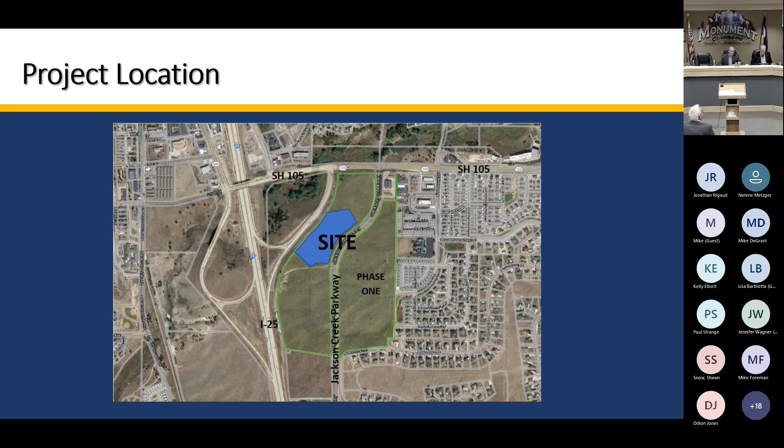Okay, so as you can see on the screen before you, project location. This project is located west of Jackson Creek Parkway, south of State Highway 105. Existing zoning for this area was approved by the Board of Trustees on June 15th, 2020, known as the Village Sketch PD at that time. The approved sketch PD identified the project area in question this evening for Lot 5 as multifamily with 15 to 25 dwelling units per acre.

The sketch PD plan from the town's previous land development code describes it as a conceptual version of the preliminary PD site plan. In preliminary fashion, the sketch PD plan indicates the proposed uses and densities of the property, including open space, parks, and regional trail corridors, and major planned roadways and utility services.

February 7th, 2022, Board of Trustees approved resolution number 08-2022, a resolution approving a preliminary final plat for Monument Junction West, filing number 1. Monument's Land Development Code, section 18.01.310, discusses site-specific development plans that are subject to vested property rights, including an approved final PUD, an approved conditional use site plan, and an approved final subdivision plat.

In this case, of course, we're talking about the approved final subdivision plat, which has led us to where we are this evening, which is to discuss the PUD. Additional zoning on this site includes the Woodmoor Water and Sanitation District, which will provide both water and wastewater services for all development within Monument Junction. Existing surrounding uses include the YMCA, I-25, vacant land to the south, and the remainder of the undeveloped Monument Junction parcel on the east side of Jackson Creek Parkway.

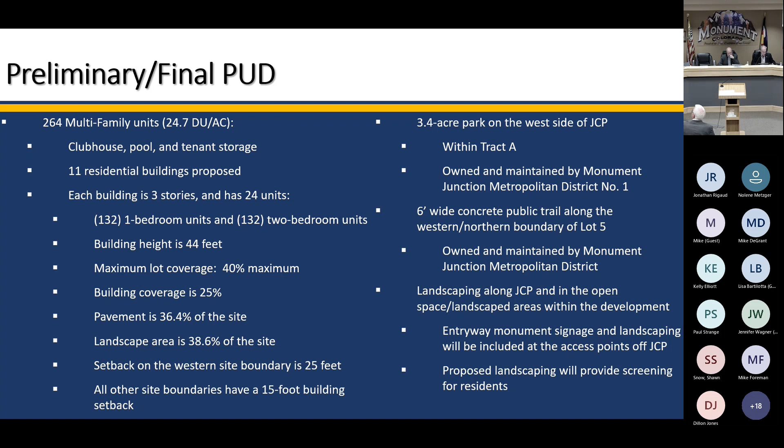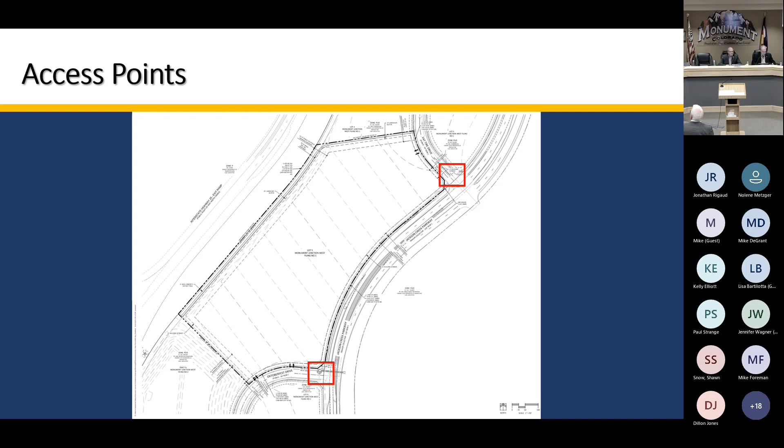The plan was looked at through the lens of the Town of Monument's Comprehensive Plan, which lists numerous attributes and characteristics used to measure a project through that lens to understand if it is compatible with the type of land use on the map in place for the comprehensive plan.

The map shows this area as a mixed-use development. Some of the policies related to that mixed-use type development are as follows. The first is to allow for a wider array of land use types to meet changing community needs. I'll read through this so we understand what our comprehensive plan says, since sometimes elements in it might seem to contradict one another because there are lots of aspirational goals within that plan. This first one discusses this wide array of land use.

The variety in residential density, type, lot size, and price point proposed will expand the housing options in Monument. In particular, there are insufficient housing options in the Town of Monument to meet growing workforce demand. The proposed multifamily will provide a more affordable housing alternative to serve the growing area workforce.

The next policy would promote infill development on vacant land, with attention to the vacant or underutilized land in and around the downtown core. The proposed development of this vacant and underutilized infill site, located less than a mile east of the downtown core of Monument, will diversify land use in the town and provide much needed housing options.

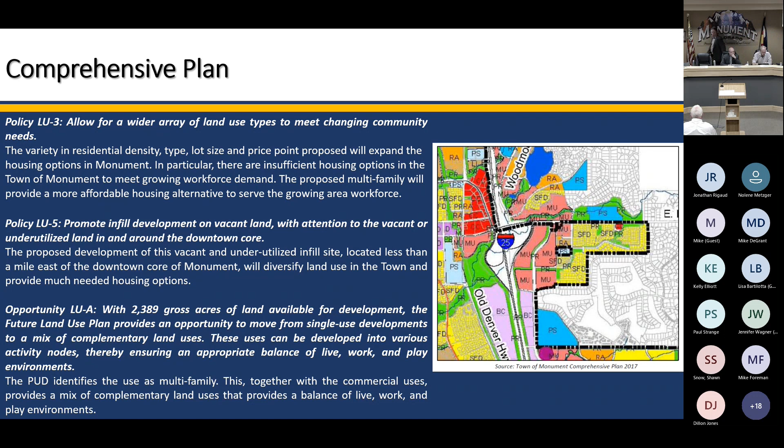This particular PUD identifies the use as multifamily. This, together with the commercial uses, provides a mix of complementary land uses that creates a balance of live, work, and play environments. Additionally, planned developments provide more amenities than traditional zoning in return for greater flexibility.

This is typically in the form of parks, open space, and trails. When approving planned developments, the town looks at ways to locate dedicated land and trails to connect with existing parks, trails, and usable open space. More detail now for how that relates to this development.

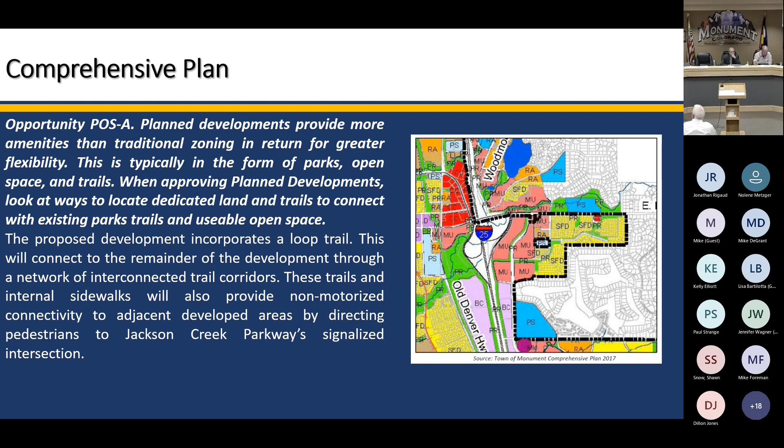The proposed development incorporates a loop trail. This will connect to the remainder of the development through a network of interconnected trail corridors. These trails and internal sidewalks will also provide non-motorized connectivity to adjacent developed areas by directing pedestrians to Jackson Creek Parkway's signalized intersection.

Staff recommendation for this project: staff reviewed the proposals in light of code requirements that affect what happens on a piece of land, as well as how the proposal addresses the comprehensive plan. Planning staff must weigh the options and use the comprehensive plan as intended, as an advisory and aspirational document that will guide the types of growth in Monument.

In the end, the town staff are obligated to pursue the approved sketch plan and final plat for the site that outline percentages of land use. In the sketch plan, commercial uses were given a lower land use percentage overall in comparison to mixed residential forms.

Staff recommends approval of Monument Junction West Lot 5 preliminary final PUD based on the findings that the preliminary final PUD is in conformance with the review and approval criteria from the Town of Monument's Land Development Code Sections 18.03.450 and 18.03.460.

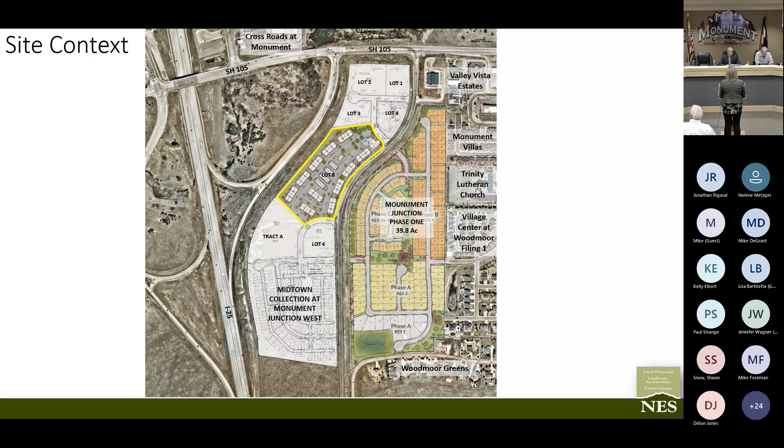Tract A is a planned detention pond that will be combined as a park use, so there will be a park in Tract A. And then on the south side is the Midtown Collection at Monument Junction West, which has been submitted to the town, for 129 single-family detached residential units at a little higher density. So that's the overall context for the development. Next slide.

So originally this property was zoned PCD, Planned Commercial Development, with the Regency Park overlay. It was zoned as PCD for many years. It's been owned by the previous property owner since the 80s, and was in commercial use, commercially zoned vacant property for many, many years.

In 2015, initially they decided to try to rezone that to residential in its entirety. That was denied by the board at the time. Then we came back in 2019 with an application to rezone the property for a mix of uses that were subsequently approved in 2020, including commercial and residential of different densities.

So PCD was the zoning. That has now been translated - it was zoned for PD, but that was translated into a PUD zoning in the context of the rewrite of the zoning code. So the current zoning is PUD.

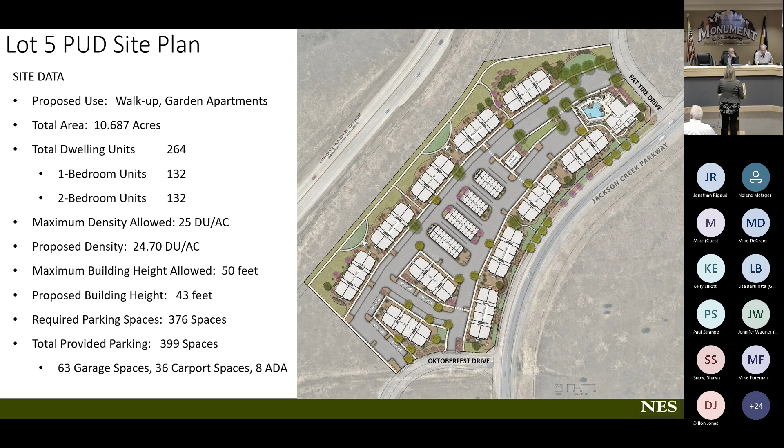Next slide. So this and the next few slides are going to look at setbacks and buffers. We are providing a buffer to the north because the adjacent lot will be commercial development, so there is a need for buffering between non-residential and residential. On the west side, we have a 55-foot utility and drainage easement, so that requires the buildings to be outside of that easement area. We actually have a 55-foot setback on that side of the development, which is more than was originally planned. On the sketch plan, that showed 25 feet, but because of that required utility easement, we are at 55 feet.

On the south side, we have 15 feet, and on the east side, we have a 15-foot building setback to Jackson Creek Parkway, and I'll talk a little bit more about that. But when we presented this plan to staff, they were very keen on us having that presence on Jackson Creek Parkway to create a more interesting street scene and also to create that presence on what they saw as Jackson Creek Parkway moving to be a future multimodal street.

It's going to be a major collector, 4 lanes in the future, and that's going to include sidewalks and bike lanes. So by creating that closer presence to the road, they preferred to have that active street frontage and put the parking behind the buildings, screening the parking with the buildings and providing a more active frontage. That was very much encouraged by staff when we had our pre-application meeting, and that's the approach that was taken to the development and design of this site.

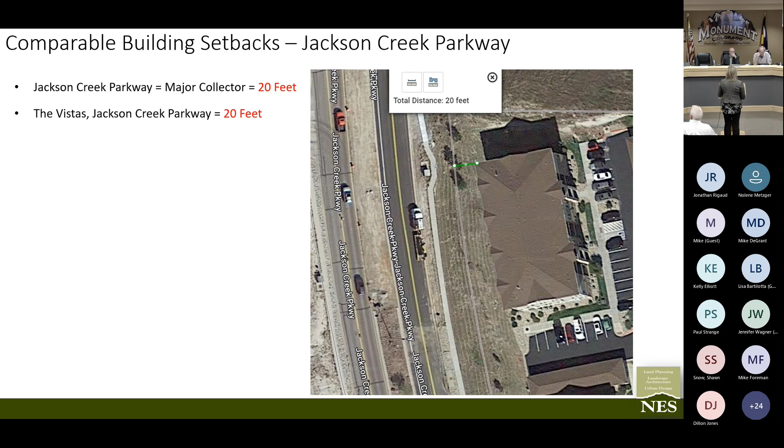Next slide. So we measured our building setback—we've asked for a minimum of 15 feet from Jackson Creek Parkway. That's because of one pinch point on the site where the balcony is about 17.5 feet from the edge of the property line, and that's only in one location. You can see from this slide that there are multiple locations where the setbacks exceed 20 feet, and the average is about 23 feet. So we are meeting that previous expectation of the setback from Jackson Creek Parkway.

Next slide. This diagram shows a couple of things. First, it shows the actual building height of 43 feet compared to the maximum allowed—you can take it to 36 feet to the midpoint of that sloping roof. Our minimum setback of 15 feet to the property line is identified, with PL representing property line. Between the property line we have a landscape area within that 15 feet, which is about 17 feet to the balcony and just under 20 feet to the nearest building point.

But from the property line to the edge of the pavement of future Jackson Creek Parkway is a total of 41 feet from the edge of the building to the edge of the curb—a fairly substantial setback from the street itself. So the buildings won't be 15 or 20 feet from the edge of the road as you drive along Jackson Creek Parkway; they'll be set back about 40 feet based on the requirements for a sidewalk and tree lawn. This plan assumes a widened Jackson Creek Parkway, widened to the east—the existing two lanes will form the future southbound lanes, and the future northbound lanes will extend to the east. So that's really to the edge of the current curb line of Jackson Creek Parkway. Next slide.

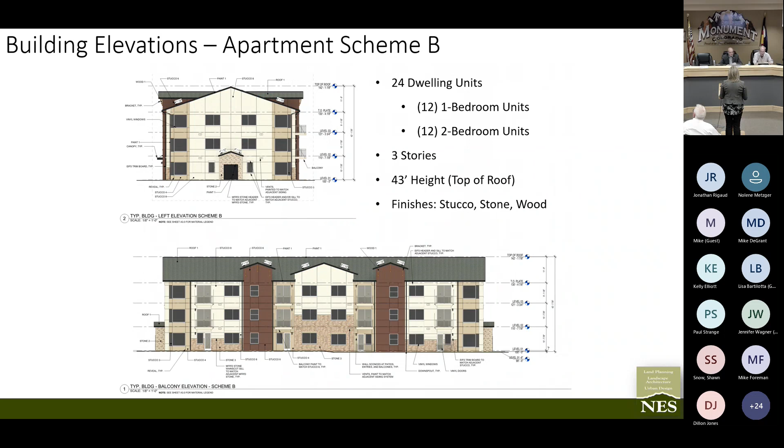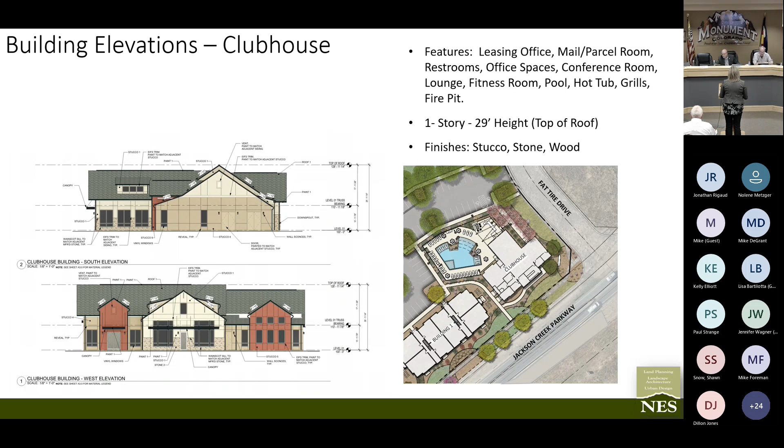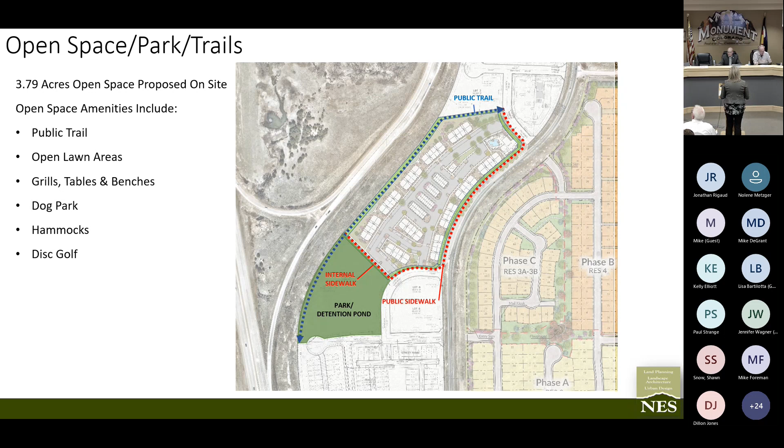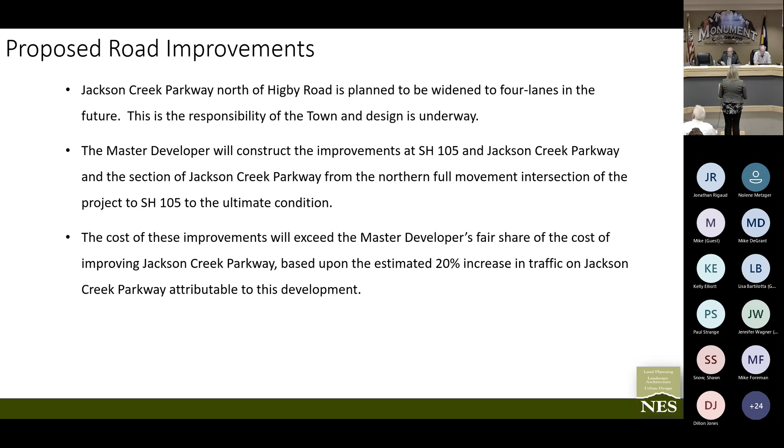So just to reiterate the actual improvements, the first one to note is that there will be an eastbound right turn deceleration lane and free right turn lane from 105 onto Jackson Creek Parkway. That doesn't exist today, and it will significantly improve traffic flow. Right now, if you want to turn right and there's somebody in front of you going straight, you're stuck waiting.

So this will allow you to turn right. Moving on, Jackson Creek Parkway going northbound and then turning left onto 105 westbound, there will be 2 left turn lanes, and the right turn lane going east will be extended. This will significantly improve the turning operations at Jackson Creek Parkway onto 105, with the intent to limit some of the queuing currently experienced.

There's also going to be some restriping to accommodate a dual westbound left turn lane from 105 onto Jackson Creek Parkway. And then there will be a southbound right turn deceleration lane that will go into Laughing Lab Way, which is the first access into Monument Junction. That will be right in, right out only at that point.

Moving further south to the Fat Tire Drive access, which is the first access into Lot 5, this will be a full movement intersection because Fat Tire Drive goes into the development on the east side of Jackson Creek Parkway. So there will be a right turn deceleration lane there and a northbound left turn lane. Those are the principal improvements that will be implemented by this developer from Fat Tire Drive north to Jackson Creek Parkway and 105.

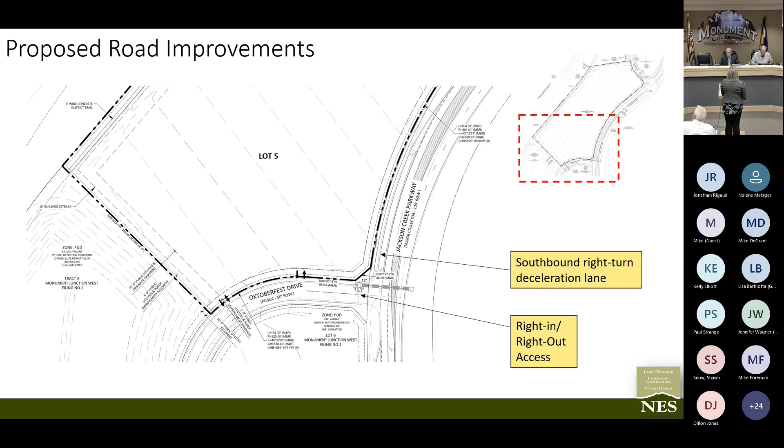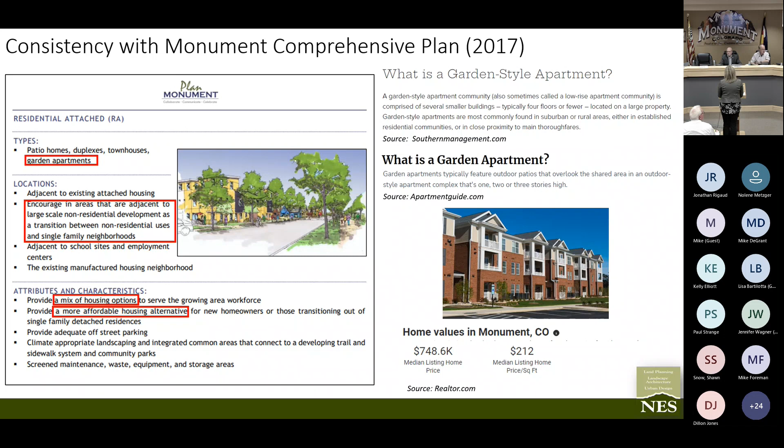I mean, from the top-down view, I just don't believe it's going to look the same. Well, if I could go back to the slide with the cross section, that's exactly what you'll have here. You're correct that from the edge of the pavement on Jackson Creek today, you have approximately 20 feet to the property line, and then you go up a fairly significant hill because the vistas are set up in elevation, which these buildings won't be. They will be pretty much within a couple of feet of the grade of Jackson Creek Parkway.

So they're not going to be elevated about 10 feet above Jackson Creek Parkway as the vistas are. And you have the distance from the edge of the building to the property line. So we have our 15-foot setback, but the actual total distance from the building to the edge of Jackson Creek Parkway is 40 feet—approximately 20 feet of that is within the property, and approximately 20 feet is made up of the sidewalk and the parkway, the green tree lawn alongside Jackson Creek Parkway.

So it is a very similar scenario to the setback you just referred to of 20 feet and 20 feet to the vistas. That's one area we can agree to disagree on, but there is a very similar distance from the edge of Jackson Creek Parkway to the building in this case. And like I said, this one is not going to be elevated approximately 10 feet above grade.

In addition, we have constraints on this site with the utility easement on the west side—it's 55 feet, so that narrows the site considerably. We have looked at alternatives and moving the buildings back, but we start getting into pinch points for the parking. So our suggested compromise, which we felt was a better approach to addressing the neighbor's concerns, was to remove the building. That was the compromise we felt achieved more objectives: reducing building mass, limiting the impact on views as much as we could, and providing a bit more of an open vista there.

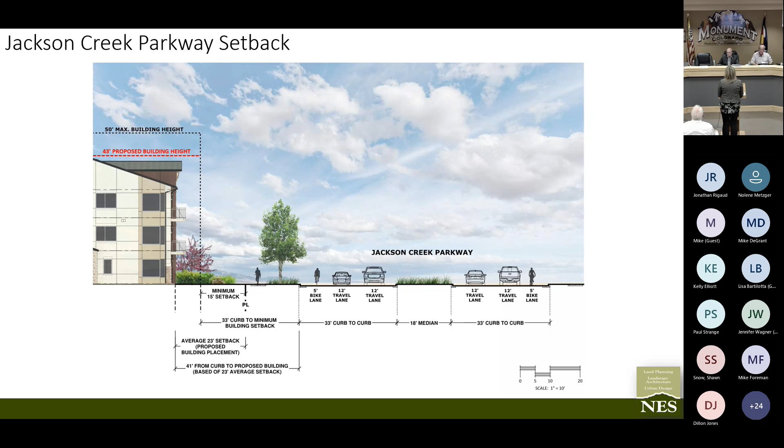I just want to clarify for my own knowledge. You would just have to remove the density. You would have to lower the density, but it's completely possible to work with the town. I just wanted to clarify because you were saying you can't. So you could, by just lowering financial viability, you could lower the density and just move and give us a bigger setback.

It is possible to do that, to reduce density even more, and we felt that the better way to reduce density was to remove the building. So we could do it. It's just something you're not willing to do. Yes, because the impact on the site's density would be too great. Okay, just the way it was worded, it sounded like it was something that wasn't possible to be done, but it is possible, it is plausible, but not financially feasible. Okay, I just wanted to clarify.

So the removal of one full building, could you explain what the financial impact of that is, and then how I assume that's going to actually make these units more expensive, correct? No, and part of that reason is because, like I said, it has been a combined effort between the master developer who is selling the land to the applicant, and there has been financial discussions to make that balance financially feasible for the applicant.

And just to be clear, I didn't have an issue with that necessarily. I bring it up because I feel like several times tonight, and with all due respect, Mr. Snow, you reiterated this rhetoric as well, that Monument needs more affordable housing. And it's one thing for the project to meet code, the comprehensive plan - those are all different issues we're going to talk about throughout the evening. I don't appreciate being told that Monument needs more affordable housing. You live where you can afford. And so to dilute the per capita income of a town by saying we need more affordable housing is not the right thing to do for me. That said, I realize that this isn't necessarily affordable housing, so I'm not criticizing it in that sense. I want to be very clear because I don't feel like Monument needs more affordable housing.

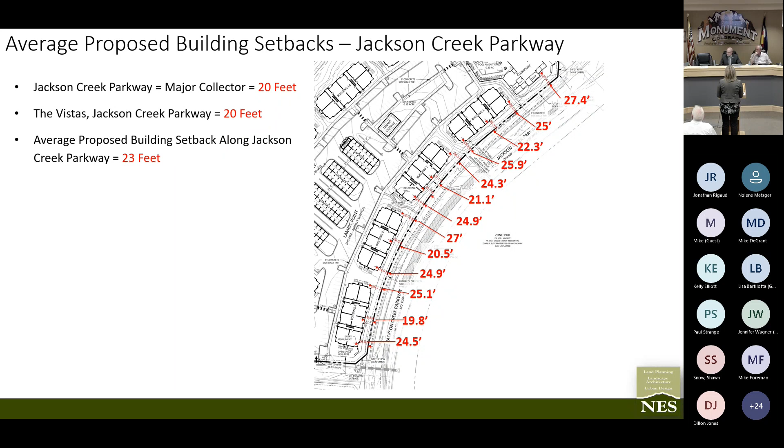Yes, collector roads is what this is. This is a question that could most likely be for staff. I don't know how these work, I don't know when it changes, but considering we're using collector roads as the 20 feet over here, we had that. Is it still up, or was it up there earlier? Does that classification of this road change, since it's going to be doubling and having more than double the traffic on it? Does this change the classification of that road? Yeah, we don't have our traffic engineer, but let's see if Mark or I can answer.

Can you ask the question again? Yes, the question is, we're basing everything off of this being a collector road. Now that this project is being built, with us being told that the road is going to double in width and double in the traffic it can handle, will that change the classification of the road? Because in my mind, that means the setbacks will need to be higher, since it's going to potentially be a different classification of road. I don't know how this works, so it's a genuine question.

Unfortunately, our traffic engineer would be best suited to answer that, and he's not with us. But I can answer the question if you like. The planned expansion of Jackson Creek Parkway is to a major collector classification. So when I reference major collector in my presentation, that is the planned 4-lane cross-section of Jackson Creek Parkway, which is being planned and reviewed by the town. They have their design consultants, FHU, traffic consultants looking at that right now. But the planned ultimate condition of Jackson Creek Parkway is to be a 4-lane major collector, which is generally 20 feet.

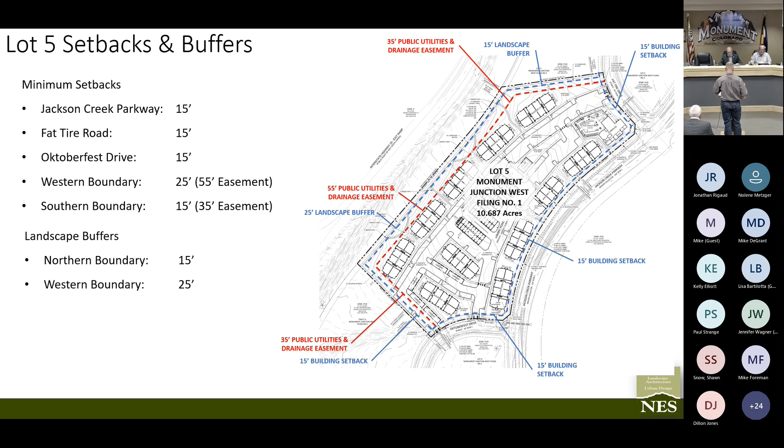Good evening, ladies and gentlemen. My name is Tony Abler. I'm a resident here in Monument for the past few years. One thing I wanted to bring up was actually some facts regarding the high density units that are being proposed.

Myself and my neighbor did a little bit of research that anyone can do on Google. If you search for high density multifamily units near us, 22 come up, and there are 5,247 units currently within a 6-mile radius of where I'm standing right now. Of those 5,247, there are 822 that are empty right now. And if we add 224, 264 - but she said they were going to take away a building. So we're wanting to add more, and how many of them are going to sit vacant?

Because we already have some sitting vacant. I just want to bring those facts up, and I have those - very simple, calling the property managers - and I have a point of contact for each of those if anyone would like to see. I just wanted to provide a little additional fact. My name is Tony Abler, A-B-L-E-R.

Who else would like to make public comment? Mr. Kimple? Good evening, Kenneth Kimple, 16151 St. Lawrence Way. I apologize for my voice because of work from earlier today.

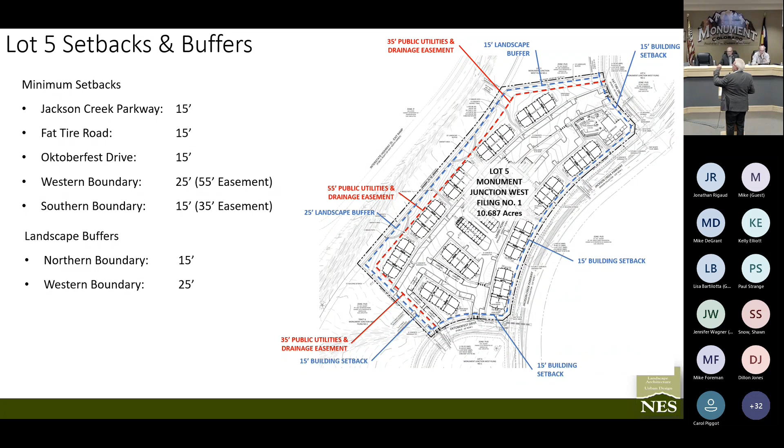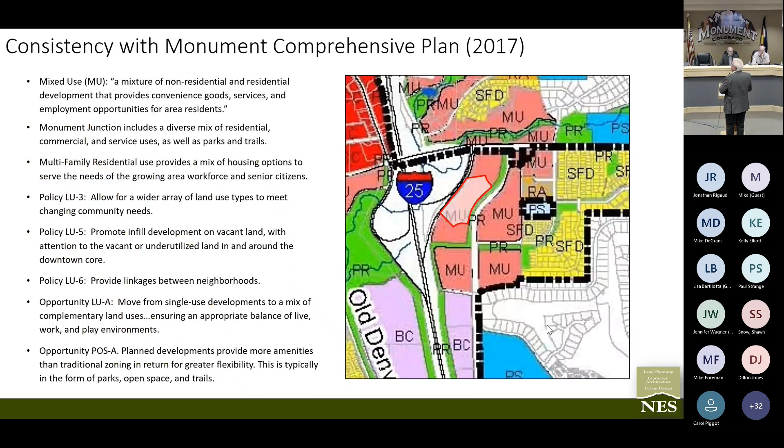Candidly, the CEO of the apartment developer told me he didn't care which building he lost. Mr. King and the Save Monument crowd and I have talked about building 2. He doesn't care if it's building 2. He doesn't care if it's building 1, if he's willing to do it.

The reason that I suggested elimination of building 2 is now you have a very significant corridor through the middle of the project. They don't want to change the rest of the building locations. Why? Because they spent a fortune and it's engineered and it's approved, and it now would require retooling where your water goes, your sewer goes, where your gas and your electric is.

And I think they're being very accommodating, and candidly, so are we, because we gave them a significant price reduction to get this concession, because we are trying to be responsive. And so the proposal is to eliminate 1 building.

The proposal is to eliminate building 2. What will they do with that space? They'll put some landscaping. They'll do something nice in there. But it's not material to making a decision tonight.

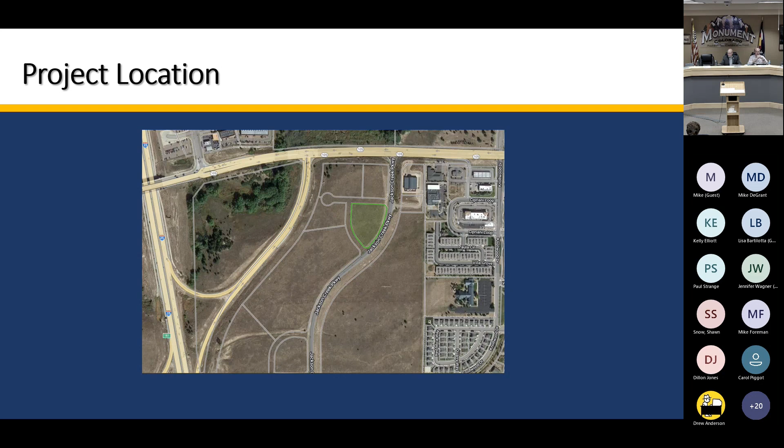This is BurgerWorks Monument Junction Preliminary Final PUD, ordinance number 19-2022. For orientation purposes, this is the lot that is just north of the presentation we were just hearing. So we heard lot 5, that's the larger parcel to the south of the green polygon that's there. The green polygon is the Burger Works location we're referencing.

A lot of this information will be very similar to what we just heard with lot 5, with a few exceptions. Existing zoning, of course, we've established that on June 15, 2020, Board of Trustees approved the Village Sketch PD plan. Within that, there was the multifamily we just went over. There's also Sketch PD. That Sketch PD plan identified the project area as a bank, restaurant, bar, car wash, convenience store, general retail, microbrewery, distillery, office, personal service establishment, pharmacy, shopping center, or small animal clinic.

Sketch PD plan from the town's previous land development code describes it as a conceptual version of the preliminary PD site plan. In preliminary fashion, the Sketch PD plan indicates the proposed uses and densities of the property, including open space, parks, and regional trail corridors, and major planned roadways and utility services.

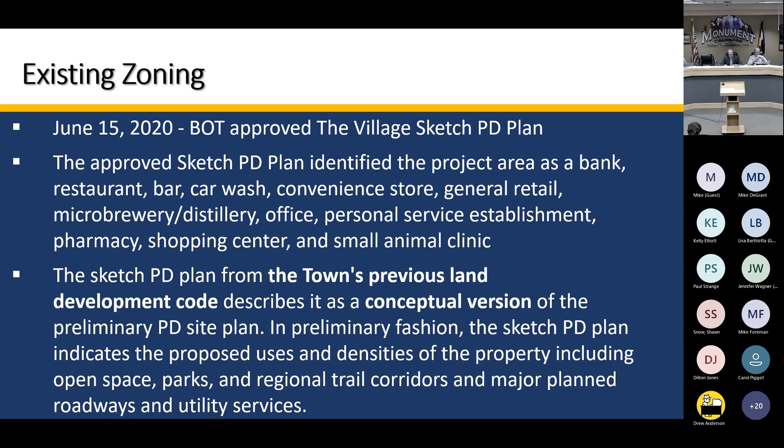The preliminary final PUD we're here to discuss: Lot 4 of Monument Junction West, filing number 1 subdivision, accessed from Fat Tire Drive and Laughing Lab Way, some unique street names in this area. Traffic control plan, this was a requirement considering that the proposed fast food restaurant is expected to bring in a lot of traffic initially and then continuing on the site. So I'll go over a little bit of that.

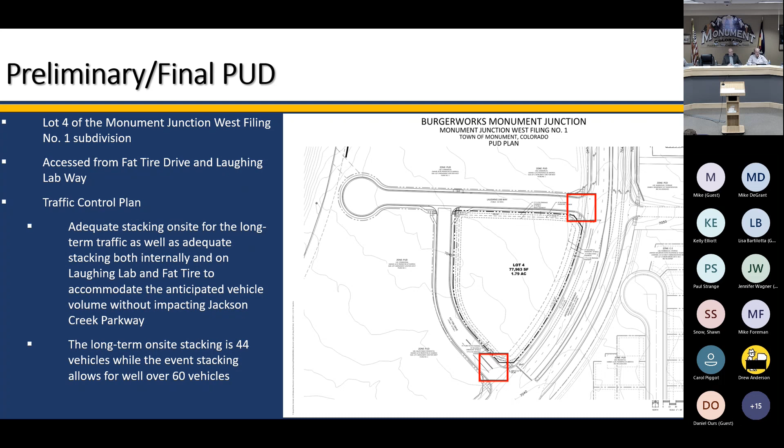The long-term on-site stacking is 44 vehicles, while the event stacking allows for well over 60 vehicles. That will be described in greater detail by Ms. Barlow, who will go over more of the traffic.

Now I'll turn my attention to the comprehensive plan and how it relates to the proposed use. One of the land use policies discusses allowing for a wider array of land use types to meet changing community needs, so staff analyzed that as follows: this fast food restaurant will help meet the changing needs of this community and new residential development in the adjacent areas. It will be easily accessible from Jackson Creek Parkway.

Promote infill development on vacant land with attention to the vacant or underutilized land in and around the downtown core. Monument Junction will provide additional infill development of currently underutilized land in Monument.

And another policy: protect adjacent residential areas from adverse noise, glare, and the visual impacts of parking and loading related to non-residential development. This site is not adjacent to any existing residential areas. There will be appropriate separation from the multifamily development planned to the south. The proposed residential to the east is separated by Jackson Creek Parkway, an open space tract, and landscaping.

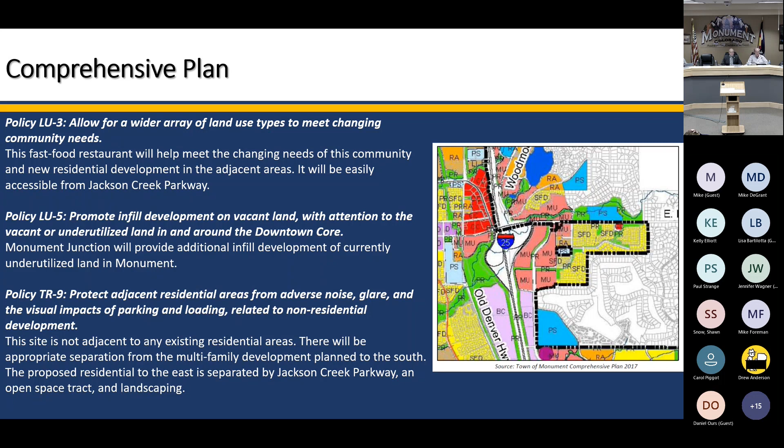Planning Commission and staff recommendations. As referenced, the Planning Commission this past week had a motion to approve as follows. Commissioner Auer states: I move that the Planning Commission recommend approval of BurgerWorks preliminary final PUD based on the findings that the proposed preliminary final PUD is in conformance with the review and approval criteria as outlined in the Town of Monument's Land Development Code 18.03.450 and 18.03.460. That motion was seconded, a vote 7-0.

Furthermore, staff recommends approval of BurgerWorks Monument Junction preliminary final PUD based on the findings that the preliminary final PUD is in conformance with the review and approval criteria from the Town of Monument's Land Development Code section 18.03.450 and 18.03.460.

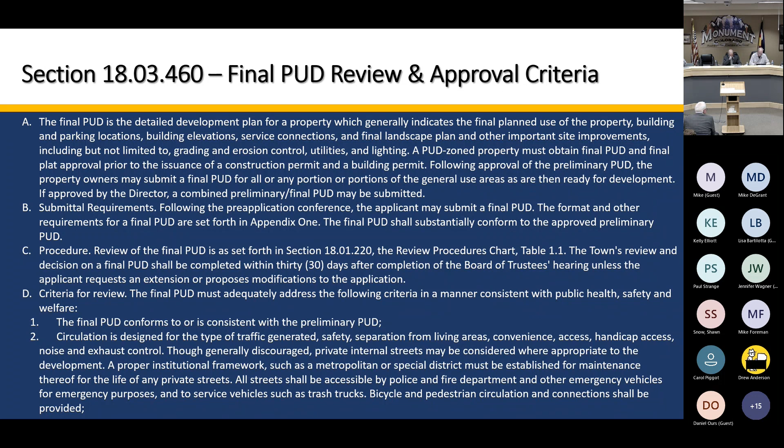As with the previous presentation, I outline the approval criteria for section 18.03.450 for the preliminary PUD. I will not go through all the details here, but it is included in your packet, as well as the final PUD criteria from section 18.03.460, for your information.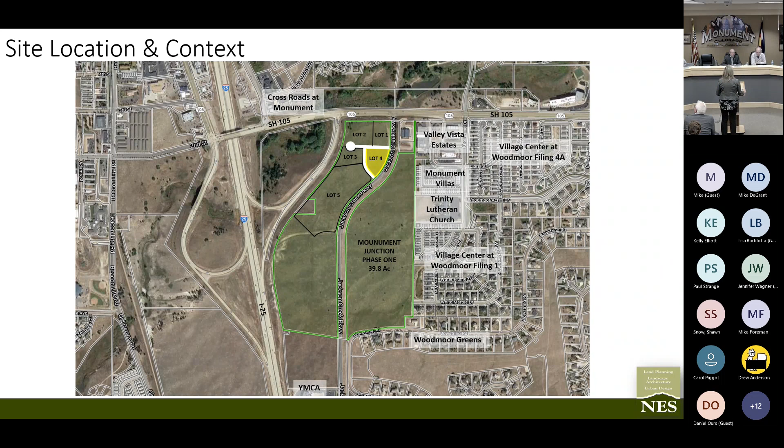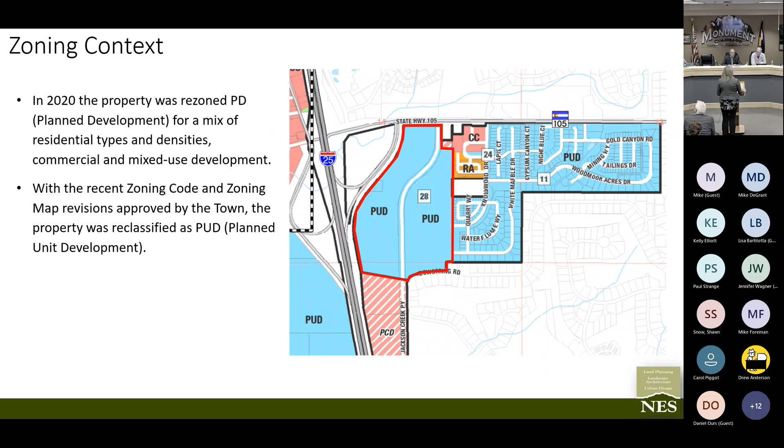We've established this is lot 4, just north of the apartment site we just considered. And the zoning you're familiar with, we can skip through the next couple of slides showing it's PUD, and the criteria I think you're familiar with by now.

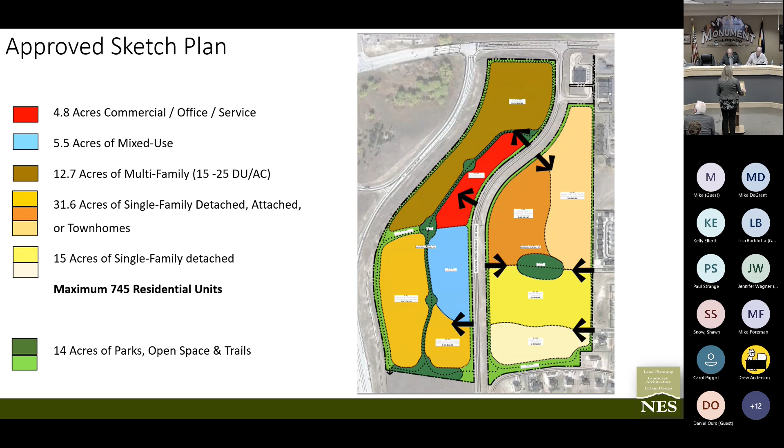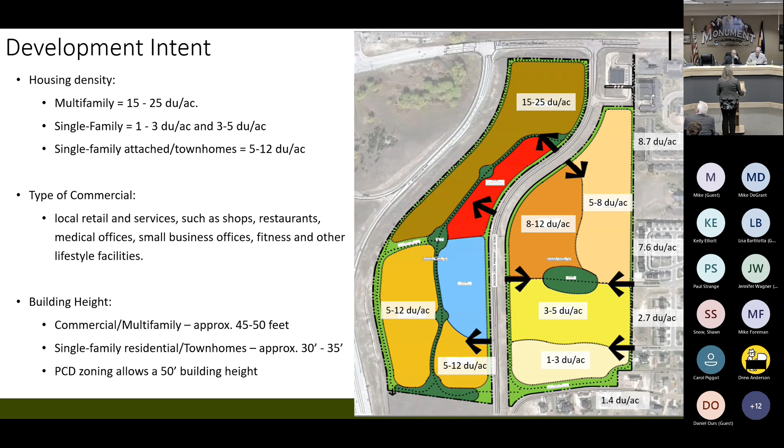Just to identify that we did show 4.8 acres of commercial, and that indicated a range of uses from retail services, shops, restaurants, medical offices, small businesses, and so on. The plat for Monument Junction West, filing number 1, reconfigured the site as previously discussed, moving the commercial to the north.

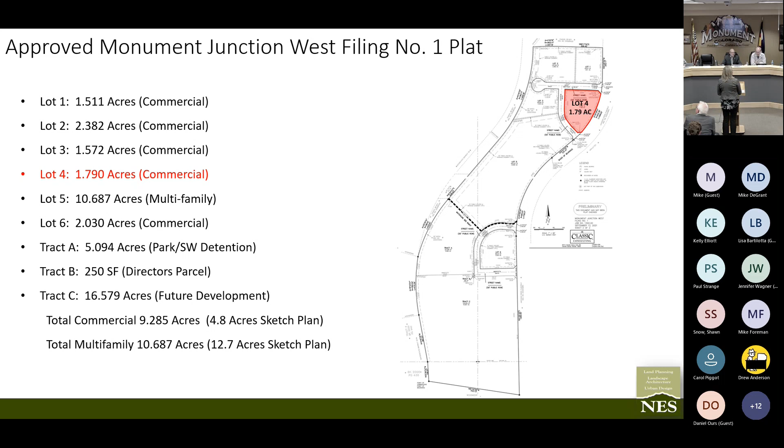Lot 4 is one of the 4 lots proposed for commercial on the north end of the property. The BurgerWorks itself is a 1.79 acre site. I just want to point out that that's quite a large site. We've done a number of the Whataburgers in the Colorado Springs area, and this is easily the largest site we've been working on, which allows us to do a couple of things.

One of them is provide additional landscaping and seating areas. We have the maximum building height, which we have identified on the PUD, is consistent with the zoning, but the height of the building is not as high as 40 feet—it's a single story building.

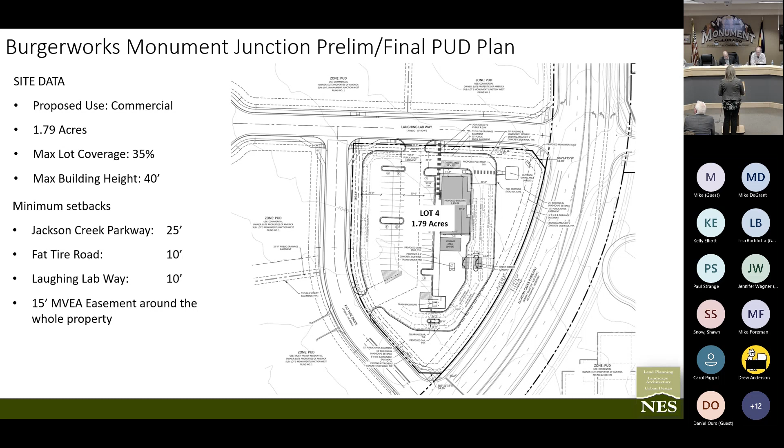This is an indication of the architecture of the building. Again, single story, a new prototype for Whataburger, with slightly different formatting for their W brand - a little more subdued than some of their other branding in the past. Their materials are consistent with the rest of the Monument Junction project.

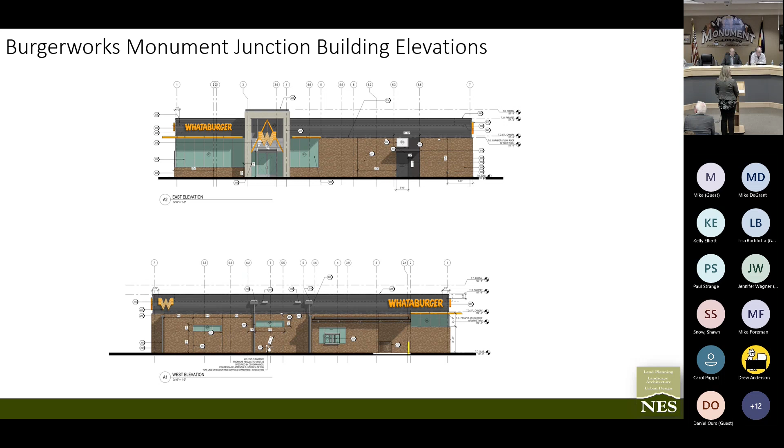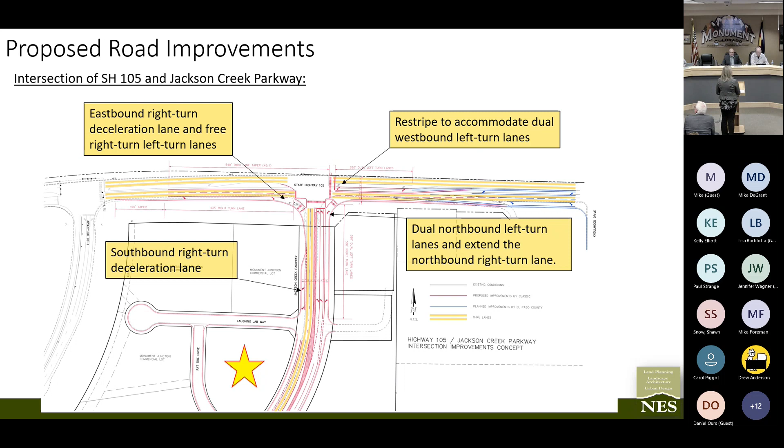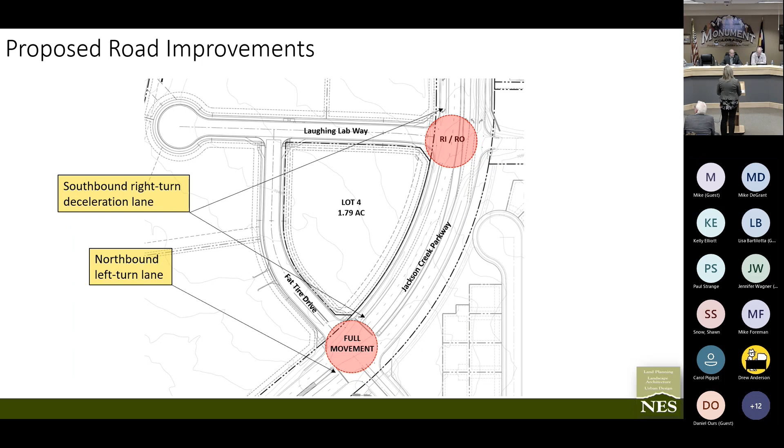This talks about the actual intersections serving the proposed Whataburger. Laughing Lab Way will be right in, right out only, with a southbound right turn deceleration lane at that point. Fat Tire Drive will be a full movement intersection, with a right turn deceleration lane installed there, and also a northbound left turn.

I want to spend a little time on something we were specifically asked to address: the opening week traffic control plan. There was quite a bit of press with the opening of the Whataburger at Interquest Parkway - that was the first store of a Whataburger in Colorado, and it attracted a lot of attention and a lot of traffic.

Since then, a new store opened on Dublin Boulevard in Colorado Springs at the end of last month. Another will open at Constitution in November. In the first quarter of 2023, another will open at Garden of the Gods in Colorado Springs. In the second quarter of 2023, two more will open at Montebello, on South Academy, and on Fillmore Street. The Monument Junction site is supposed to open in the third or fourth quarter of next year.

So by the time this site opens, there will be 6 Whataburgers within the Colorado Springs area, which we believe will significantly reduce the influx of people on opening week compared to the Interquest scenario. That being said, we are proposing a number of measures to help with that opening week.

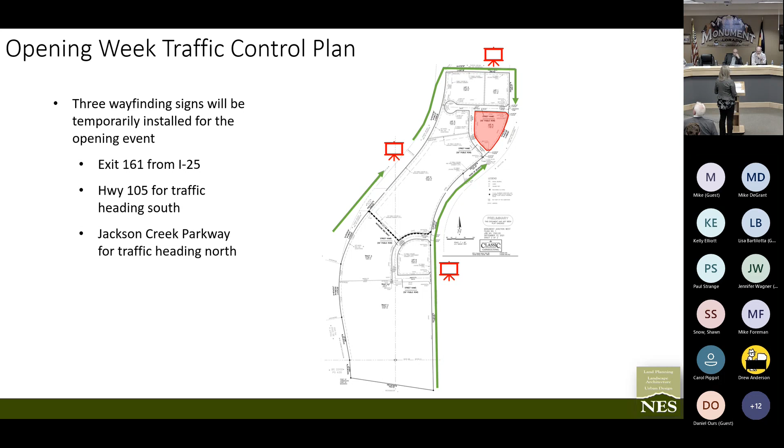Regarding internal circulation, first thing to note is there will be security personnel at each of the entrances - one proposed off Laughing Lab Way and one off Fat Tire Drive. They will direct traffic and stay there until there is an observed significant reduction in the amount of traffic coming in and out of the development, really to service that initial traffic during opening week or the first few days.

The green lines identify the incoming traffic, which will be directed to utilize the Fat Tire entrance. There is approximately 350 feet of stacking distance on Fat Tire Drive, and once internal to the site, an additional 860 feet of stacking - over double what was available at the Interquest site.

This is where I was talking earlier about the benefits of the larger site - it's enabled the site plan to incorporate that stacking internally and also have 3 drive-through lanes. This is the only Whataburger being proposed with 3 drive-through lanes; all the others have 2. That will also facilitate an easier flow of traffic.

Once you leave the drive-through - and this is primarily for the drive-through scenario - if you want to come in and sit and eat, you could park; there's ample parking there. Directing people to leave the premises is the red line - they'll be directed to circle around and utilize the full movement intersection at Fat Tire Drive.

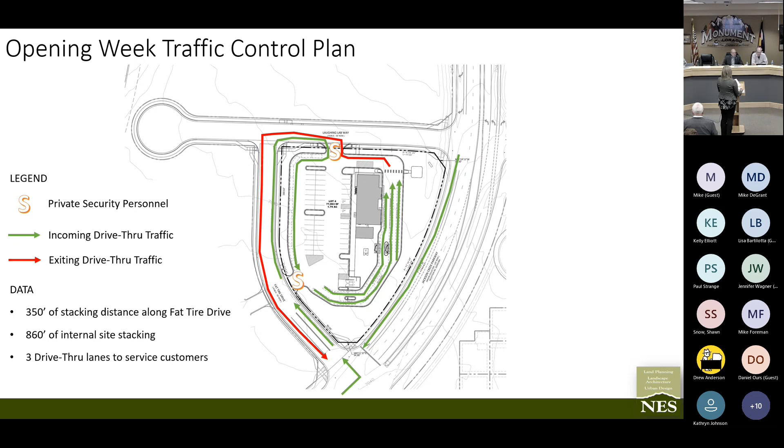So that's the plan for the opening week. It's something the franchisee, Mr. Taminga, has worked carefully with his security people to develop, and we're confident it will run smoothly in those first few days.

We talked a lot about the comprehensive plan. It's part of the mixed use scenario for this development, which incorporated a mix of commercial, residential, and other uses.

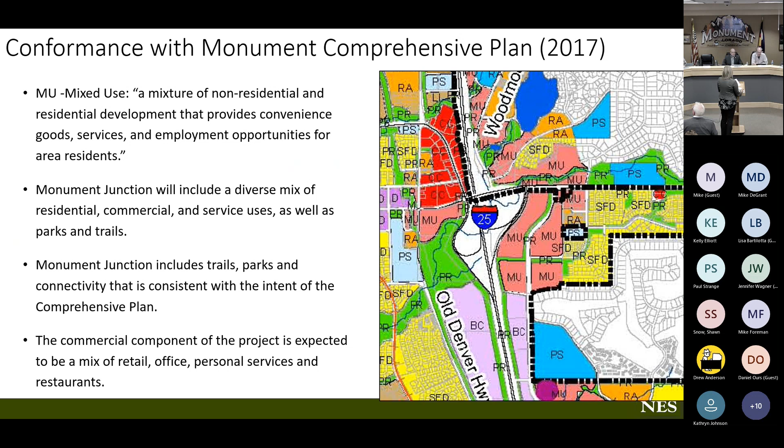There are some more specific policies in the plan relating to commercial development, encouraging capitalizing on the I-25 interchanges within Monument, which this one clearly does being adjacent to the 105 and I-25 interchange, and also encouraging businesses, shopping, service, and employment that will help support Monument as the activity hub for the Tri-Lakes region.

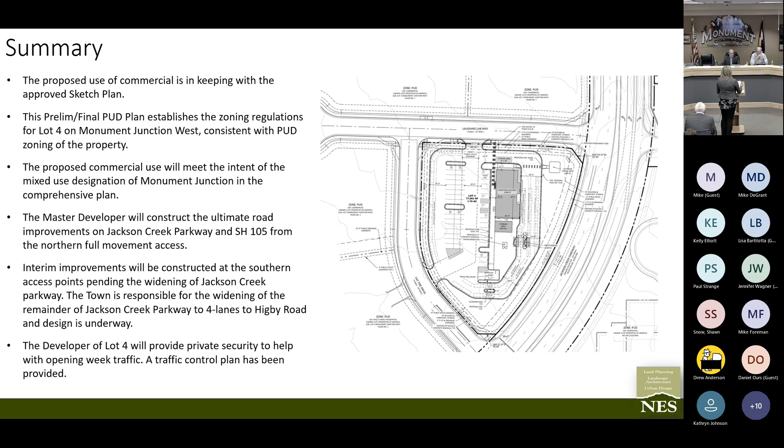So in summary, we think this meets the intent of the sketch plan by proposing commercial development in line with the type of commercial development that was presented with the sketch plan project, both in the project statement and in the presentation to the Planning Commission and Board. The commercial is consistent with the mixed use intent of Monument Junction. There will be road improvements to support the development, and we went through those in detail in the last presentation. We will have private security and an opening week traffic plan to support that initial influx of traffic. With that, we're happy to answer any questions.

Questions from the board for the applicant or town staff? I have one question. With the road improvements to support the development, is that a requirement before this is built, to have the roads finished?

So Fat Tire Drive, and I'm trying to work out your actual question. Fat Tire Drive and Laughing Lab Way will be constructed prior to the development, and the interim improvements will be constructed, but the ultimate improvements from Fat Tire Drive to 105 will be phased in over time. Okay, so yeah, I apologize, that was my fault, I didn't ask that clearly enough. I think you did answer it. So the existing road that is to be widened, that's not a requirement that it's going to be widened before this is built.

Okay, can I ask one more question? I think somebody else is going. Chief, if I could ask you a question. I know you are chomping at the bit for Whataburger, so try and take just your chief hat on right now, not your love of burgers hat. Do you think there are any concerns with opening week in terms of traffic, opening months in terms of traffic, or even ongoing, that has not been addressed by this presentation?